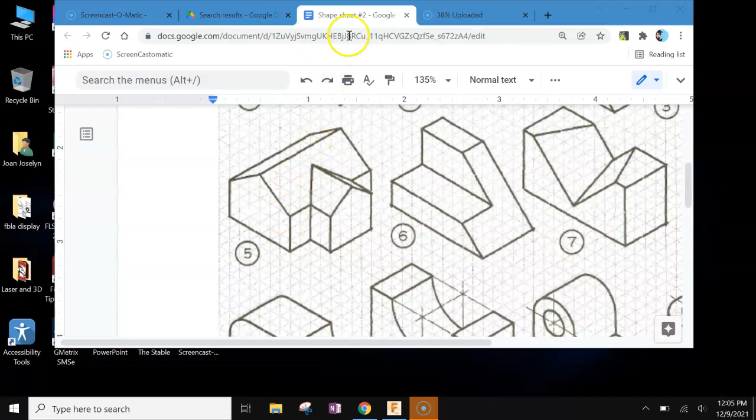All right, so this looks like 1, 2, 3, 4, 5, 6 by 1, 2, 3. So I'll start there. Let's make a new file in Fusion. I'm in inches, my y-axis is up. I'm going to do a new sketch, and I'm going to start on the XY plane - that's how I see this side of the house. I think I'll use the rectangle tool to get started.

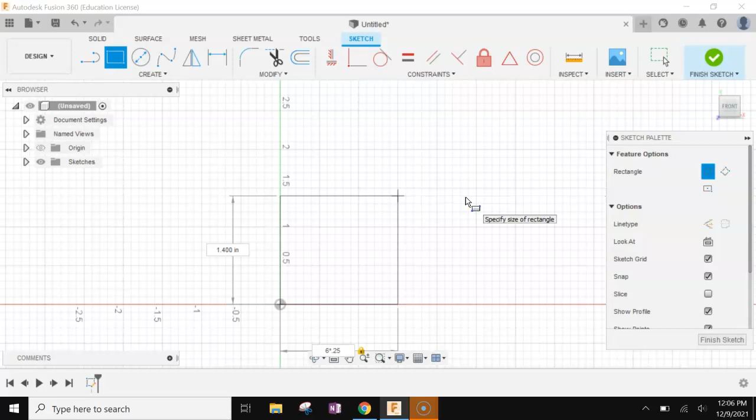And I think I said 6 across the bottom, so 6 times 0.25. I forgot how much it goes up - I haven't left clicked yet, so I'm just going to come down here and take a look. 1, 2, 3, 4, 5, 6, and 3 up. How did I forget that so quick? If I hit tab on my keyboard, 3 times 0.25 is 0.75 inches. So you got 1.5 inch by 0.75 inches.

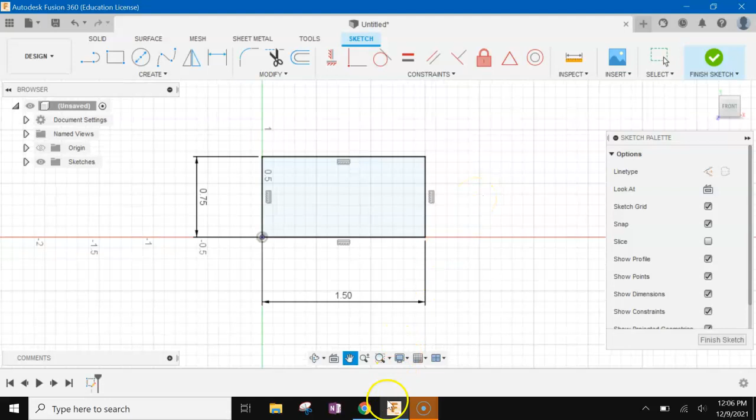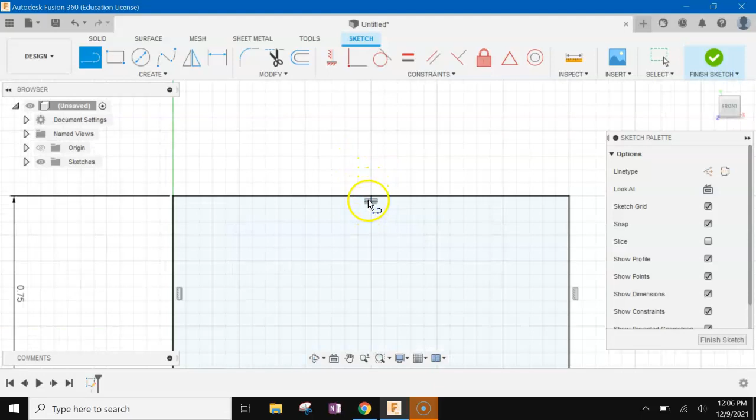And then let's throw that house up there. So it looks to be about 1/2 inch tall from that center there. So I'm just going to put a little line in there to guide myself. I'm going to get the line tool and make sure I'm in the center - I can tell that by this. I'm going to drag up, and I think it was too high, so 0.5, or 0.25 times 2.

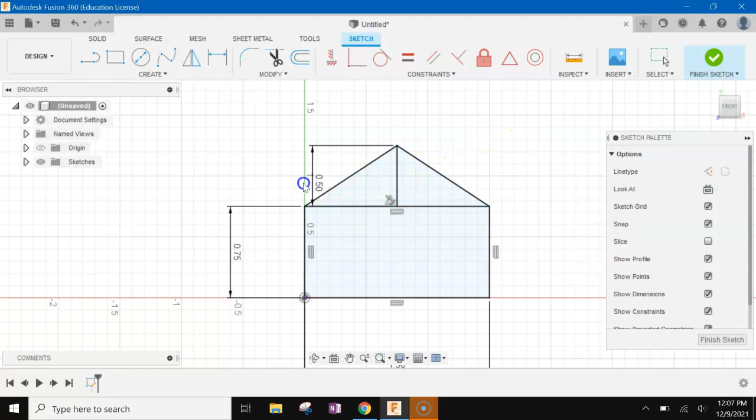You don't need this line, it's just going to guide me. Now I can click there and go to my corner, and then click there again and go to my corner - so I've got the whole house. I can either delete the line or just extrude around it, which is what I think I'm going to do. So let me go finish my sketch.

I'm going to hit isometric view and I'm going to extrude, but I have to pick all 3 now because I didn't delete the line, right? Select all 3 at one time before you bring it back, and then it'll work. If you do one at a time, you lose your sketches. And then it's going to go back.

Oh boy, have fun counting this. Let's see, it looks like 1, 2, 3, 4, 5, 6, and I'm assuming there's 2 on the other side, so 8 back.

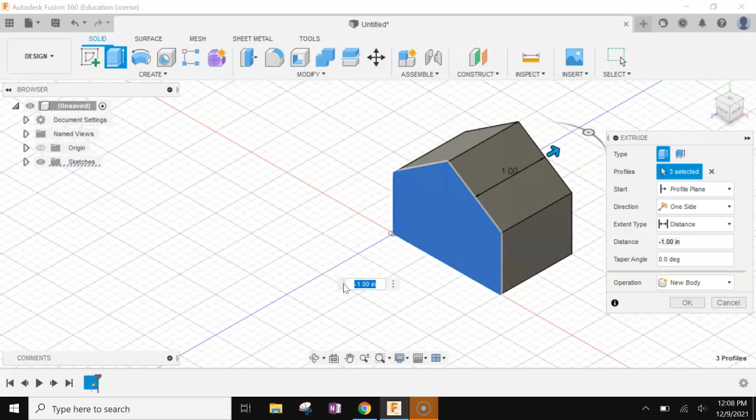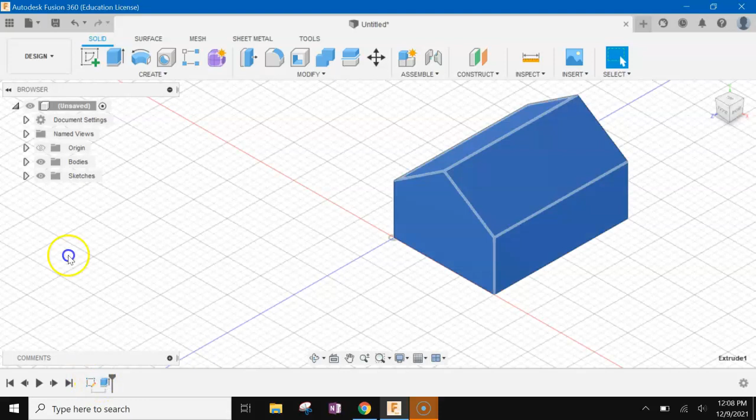Okay, so when you're working with Extrude, you have 2 little menus - this little one and then the dialog box. Either way, distance here or here, they're working together. So we said it was going to be 8 boxes on that grid times 0.25. I want to go in the other direction, so I'm just going to put a negative in front of that: -8 times 0.25. Did I put a point? Yeah, enter - there you go. And then I don't know if I said the number, so it ended up being -2 back. You could just type -2.

All right, so now we're going to put a little square right here at the base of this. So it's 1, 2, 3, 4 by 1, 2, 3, and it's 2 inches on either side. So back to Fusion, new sketch. I'm going to put it right on the side of the barn there - it's like a little barn.

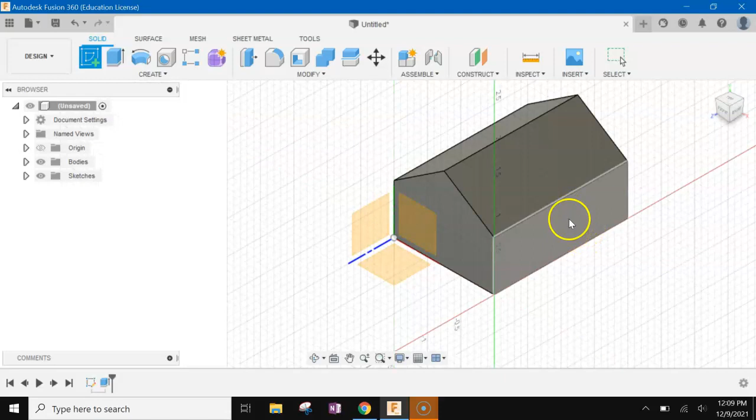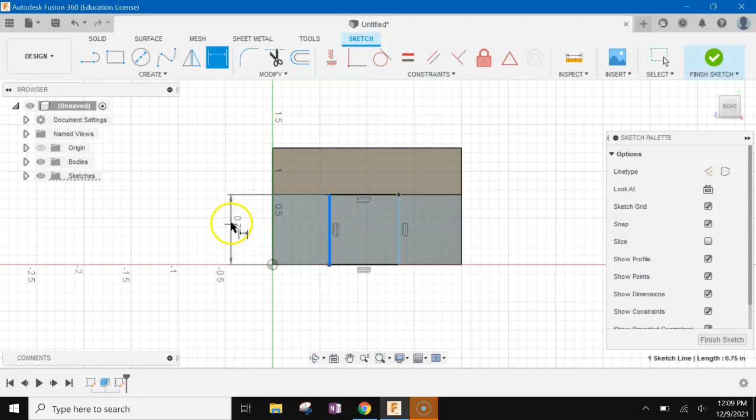I'm going to take my rectangle tool and just grab from the bottom to the top, making sure I actually hit that line. You feel it snap, click it. And now I'm just going to put a dimension on it - grab one of these, dimension tool, grab one side, make sure that it's exactly even. If you get an error message, that means hey, it already is that height - you don't have to change it, so I can leave that. And now dimension tool again - I'm going to click here and click here, so both of the right sides drag down, and I need it to be 0.5.

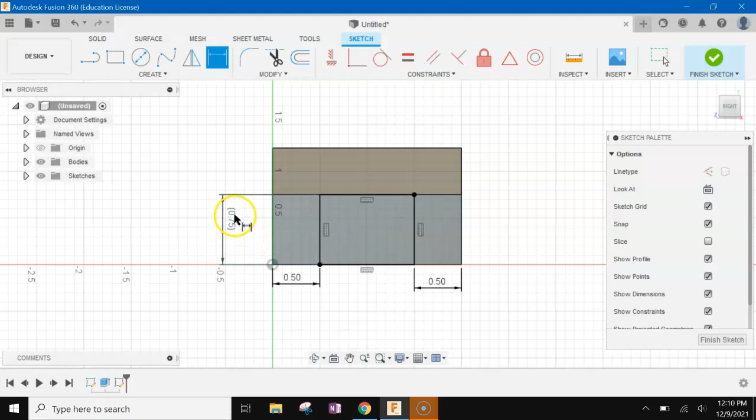0.5 on this side, and I also need it to be 0.5 on the other side. So it's 0.5 on the left, 0.5 on the right, 0.75 up. I have parentheses because I actually hit it when I first went in there.

So that's good. Okay, let's finish that sketch. I know we need the top also. We're going to add it after. Actually, can I add it now? Hey, you know what, I think I can. Let's just give it a try and see how it goes.

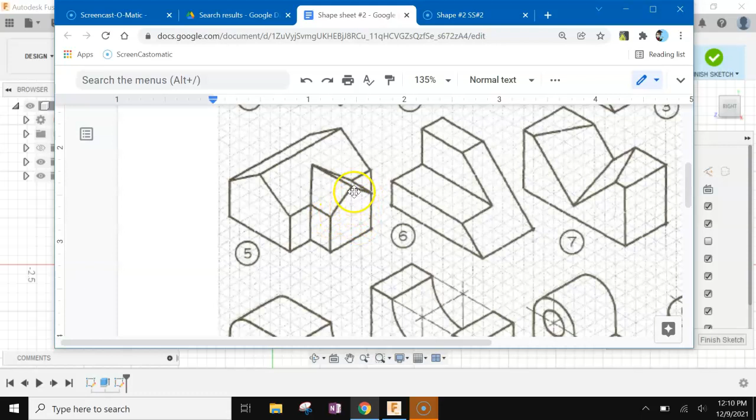I haven't tried this one yet. So it looks to be, well, a little more than one. I was going to say it was one up from that line right there. A little more than one up. All right, we'll try that and see what we do.

Come here, we'll get our line tool. I'm going to make a little triangle. Make sure you're on the center. And then how high up would I go, one would be 0.25. And the picture looks like they had a little bit more, right?

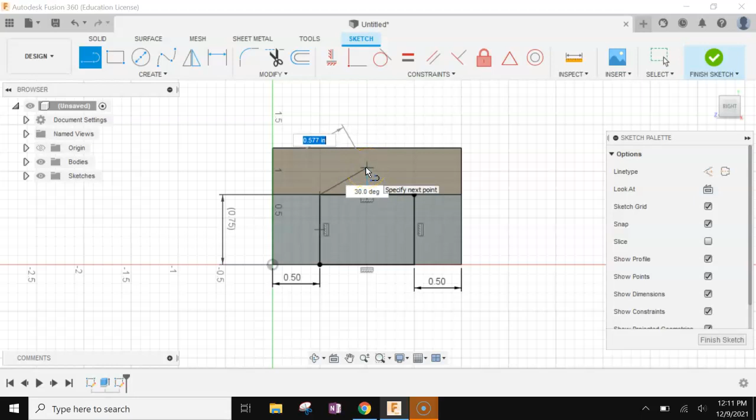Oh, when I go smaller, it looks way too small. Oh, because it's the length of the line, I see what I'm doing. Let's just click and then come down, and then we'll put the spacing in between it.

So here, I'm going to use my dimension tool, and I have it at 0.25. Let's try 0.3 and see how that looks. So I just click the center of this and this line to put that spacing in between. Close enough, it's not very specific. We don't have schematics, so we're good.

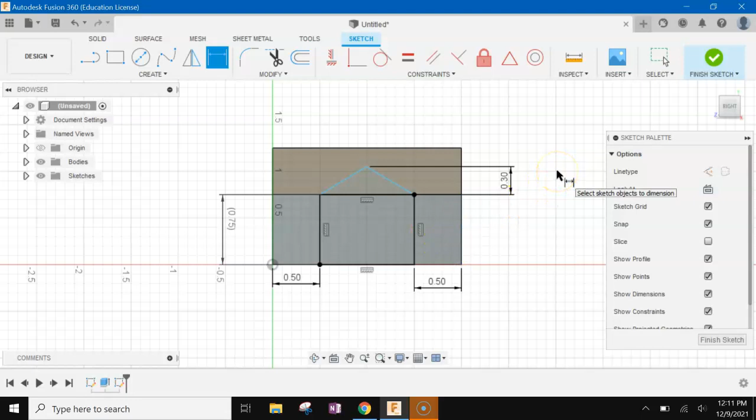All right, so now we just want to finish our sketch. So as you're looking at it, it's going to look a little weird. I'm going to come out this way first, over this direction, and then we'll go back inside there. Excuse me.

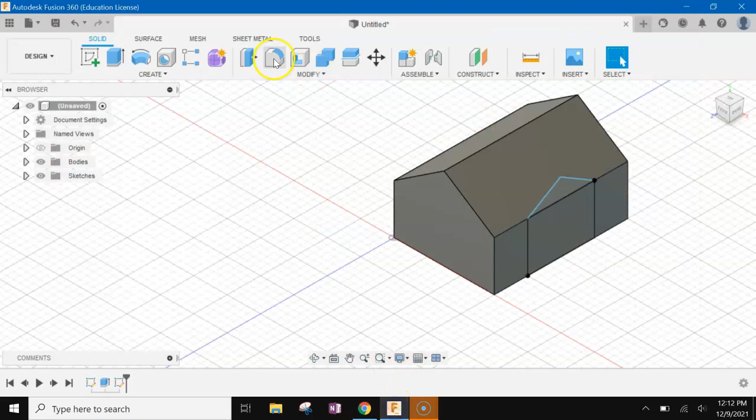Okay, and it has you coming out 2 boxes or 0.5, so let's extrude. We're going to pick this and make it 0.5. And then we just need to make it go back into the house because I don't have that going on.

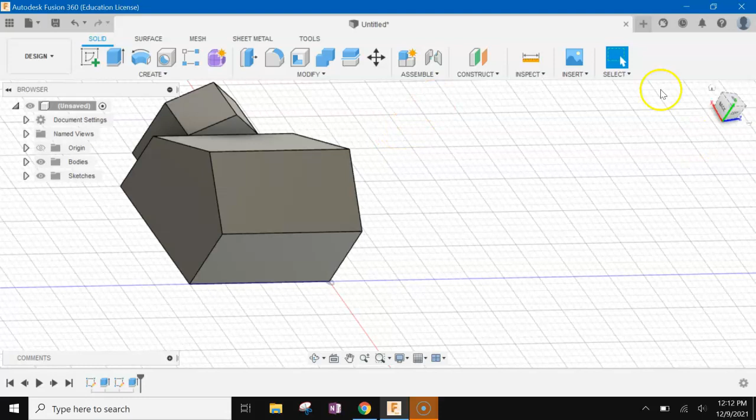So rotate around, let's hit escape, and let's just grab a new sketch and put it on the back of that triangle there. See that? You can actually just hit back if you want, but it's harder to see. So I like the angles.

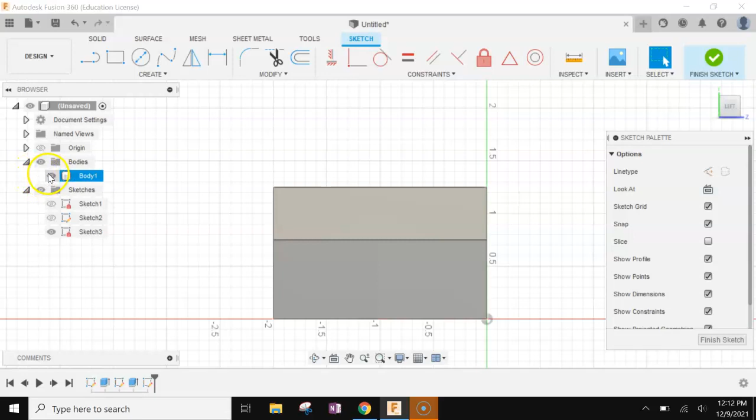Here's my orbit tool. Let's get a new sketch and let's get in this triangle. There you go. We can hide the other ones by going here. Yeah, there we go. So I went over to body and I just hid it.

And now I'm just going to trace that. Line tool, trace it exactly. Don't miss any points. Make sure you have 3 black lines.

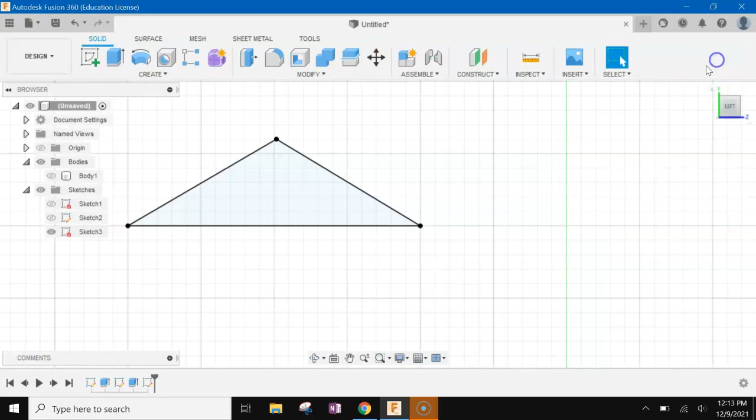Okay, finish your sketch. Hit the house button to put it isometric and bring back your body by deselecting the thing next to the marshmallow, the eyeball.

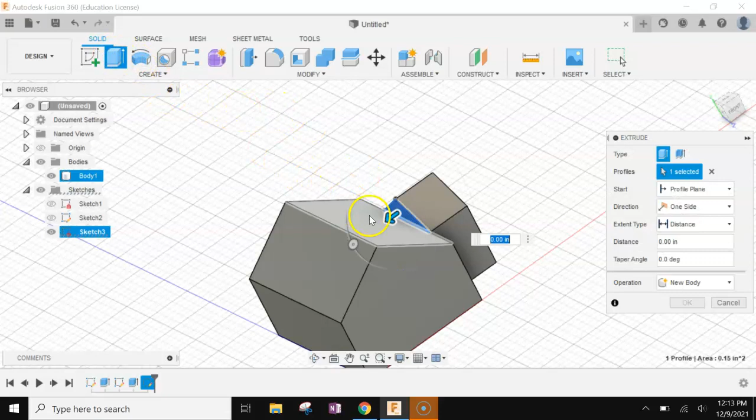Okay, so now we need to extrude. We're going to orbit, rotate, going to get the extrude tool and get that one we just did. It already selects it because it's the last thing you did, so it's like, hey, we'll do that. Rotate this way, see a little better.

And the thing is, it wants to cut right now. I'm going to hit escape. But I want to join. So come over here to your dialog box, hit join, and then it should go inside the house.

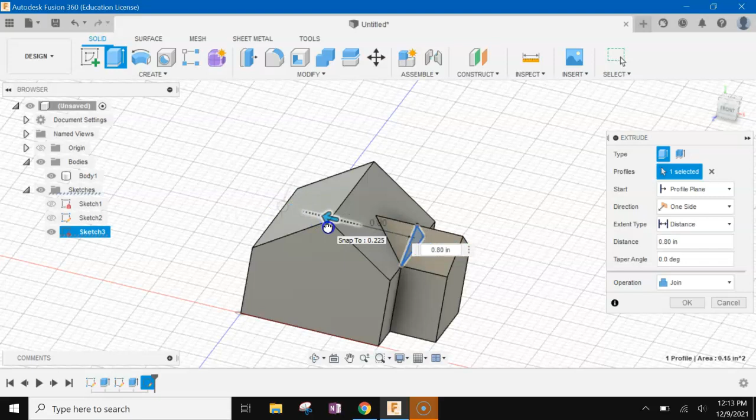It doesn't matter how much it goes inside the house. You can go on forever, see, out the other side? As long as you're in there, if you were to 3D print it, it doesn't know how far you went in, it doesn't care. Okay, so let's hit the house button and take a look.

Do we kind of look like the picture? Yeah, I think we're good. All right, good job. Don't forget to add some pretty colors, maybe a door and a window. I don't know, have fun. Save your work. That was shape number 5.